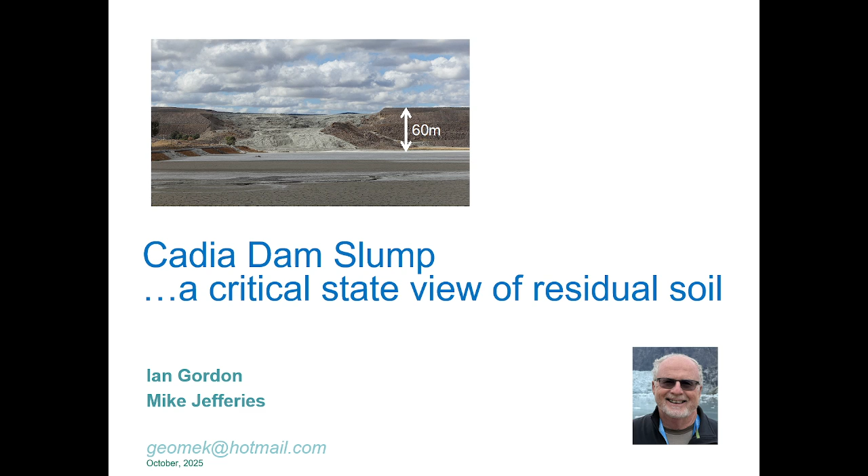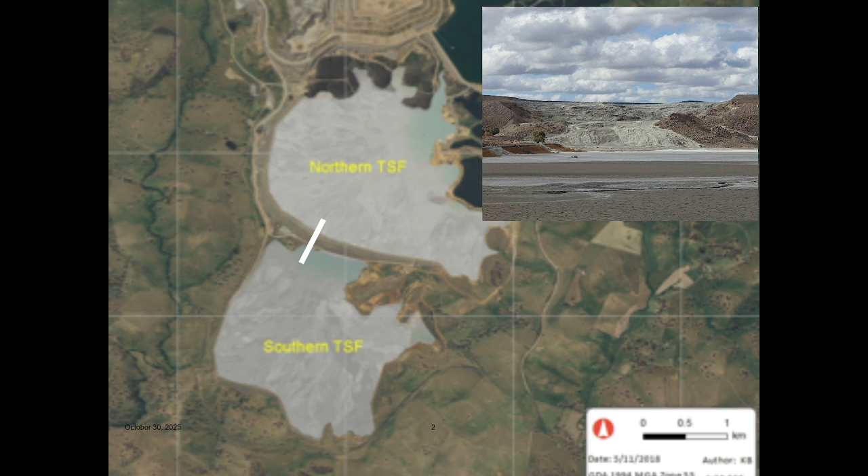If we look at what happened on the slump, this is kind of an air photo of the thing. The grid lines are a 1 kilometer spacing, and the northern TSF, the slump was where I have the white marker. Basically it failed on the corner there, and the failure was entirely contained within the southern TSF, so there was nothing released to the environment. When I look at the fluster and flurry and excitement in Australia, I'm going, hang on guys, you've had no breach of the impoundment boundary, this is an internal issue. But everybody got terribly excited, and of course we're happy if they get terribly excited because they then give us money, so we can get to do things, which we duly did.

The soil that caused the problem, the cause of the slump, has an undrained strain behavior like this. When you look at that, that's pretty much a classic liquefaction stress-strain curve: you come up to the peak, go zooming down from the peak, and it's all a bit brittle and happens rather quickly.

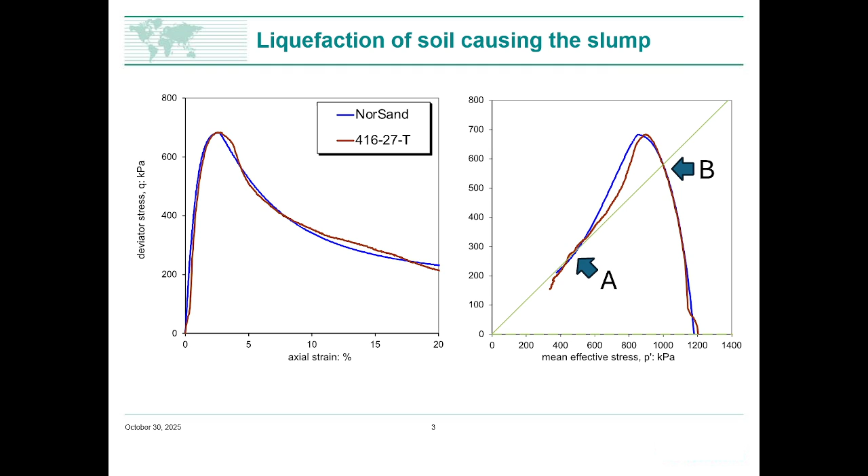However, that is not the tailings, that is actually the foundation. It's a unit called the Forest Reef Volcanics A, or FRV-A, and in the slide in front of you that's the stuff in purple. I'll come to a little bit more detail on that unit in a second.

What was going on at Cadia, and I'll get my trusty pointer here.

What we had originally in green was a conventional downstream constructed dam. And then as things go on, people say, well, let's go upstream and save some money, etc. So they switched to upstream construction, which is what you see there going up in green.

And then somebody said, whoops, this stuff looks liquefiable. We'd better put a stabilizing buttress in, because they were worried about this blowing out like that. That's the buttress there.

The intention was to put a further stabilizing buttress on this whole slope here. Well, they hadn't done that yet because there was a pile of rubbish at the toe. So they excavated at the toe to clear out the rubbish. Now you already know where this is going. The road to hell is paved with good intentions. So we're steepening the slope and digging a hole at the bottom. This is not a good plan. But anyway, that's where they went.

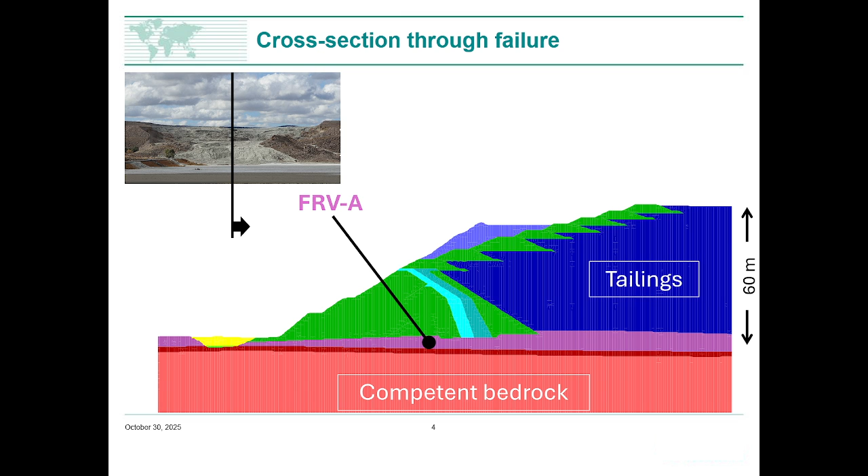So the engineers of the day said, okay, we'll expose the bedrock and get rid of the crap on top of the bedrock, and provided we're on competent bedrock, we don't really need to do a great deal of site investigation because we know geologically we've got a regional piece of rock. That is true in general.

However, down the corner where the dam failed, what we had was basalt that had flowed over the previous volcanic stuff, and the earlier stuff had decayed, become residual soil. So we had actually quite a weak residual soil, but it was masked by what appeared to be competent rock over it. So this stuff was never picked up at the site or when the dam was being constructed.

To be honest, I have also engineered dams based on bedrock and said, let's do it. I think I would also have been caught out on this one. But anyway, that's the story of this failure.

It's this stuff in here. We don't need to worry too much about that stuff there. That really was along for the ride. The story is about the Forest Reef volcanics.

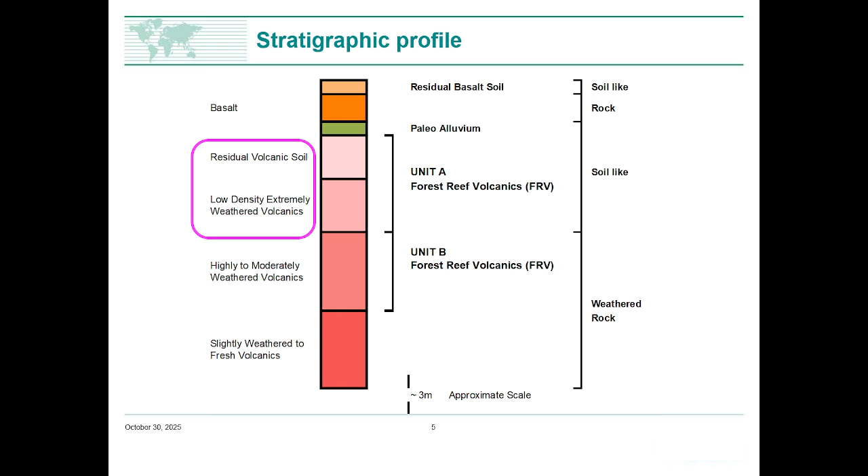This is a view of the failure looking from the top. These are the investigation boreholes, because this Forest Reef volcanics is actually, or appears to be, quite a narrow corridor.

So finding samples of it was actually quite a challenge, finding where it still existed. Now, the obvious thing to do would be to go in there and drop a borehole down and intersect the Forest Reef volcanics upstream of the failure.

That idea was indeed proposed. It was killed on health and safety grounds, that we weren't allowed access. Ian came up with the remark — we had a bunch of geotechnical engineers from both the board, Hatch, and a couple of other consultants — and Ian piped up, 'We have 800 years of geotechnical experience in this room. We all want to go there and you won't let us.'

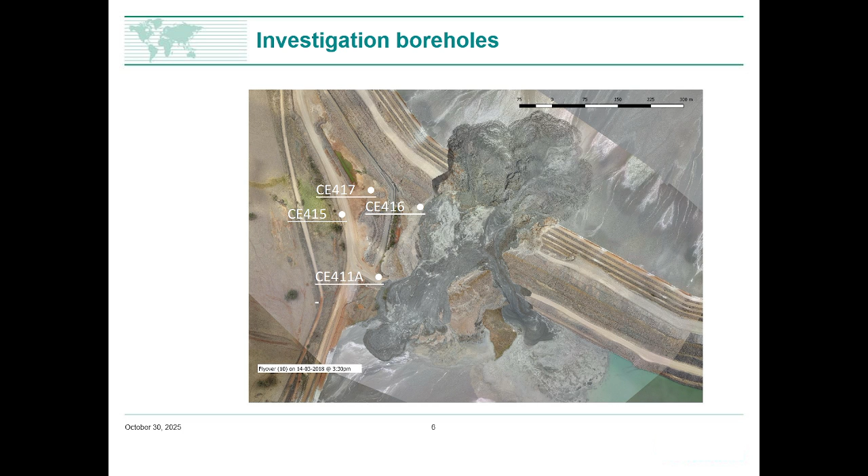Anyway, we were constrained with where we could go. So that's where the boreholes were done.

This is what the material looks like. In terms of a grading curve, you see up there, it's kind of mostly silt, a little bit of sand in it, and a chunk of clays. That's what it looks like when you get a sample and chop it in half. The white veining is kaolinite.

What I found very surprising is if you look at the right-hand plot, those are some void ratios of the as-recovered samples plotted versus depth. The solid symbols are the void ratios of the samples we tested. Also, some of the samples we didn't test actually had higher void ratios. But we're talking void ratios in the territory of 1.4, 1.2. This stuff is loose.

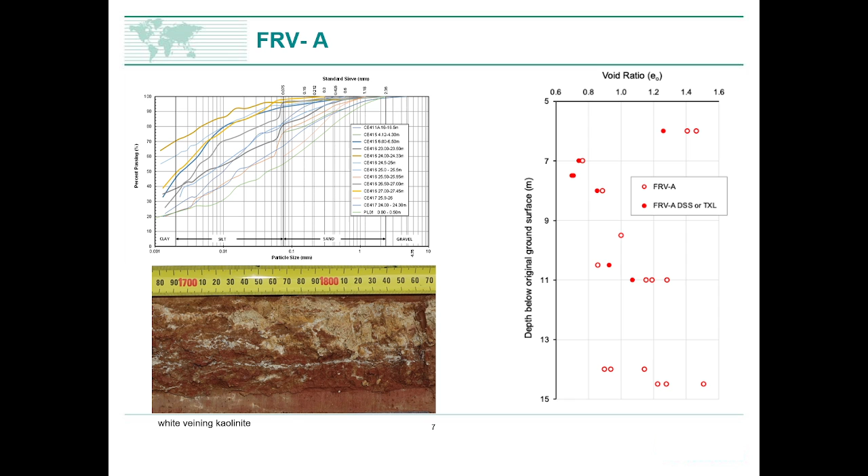Bear in mind, originally this was a volcanic rock that had a porosity maybe of like 1%, 2%, or 3%, and we've lost a lot of material through chemical weathering. And we've got a very loose structure. So surprise, surprise, it looks like a liquefaction failure.

And then we consolidated them to the stress range we thought of interest for stability of the dam, which is that grey zone, and that's a consolidation trajectory. Most of them more or less follow the oedometer curve, so we felt they were preserving original structure. There's one there, you can see, that one had a lot of disturbance in the sample, which then collapsed as we brought it to the interesting test pressure.

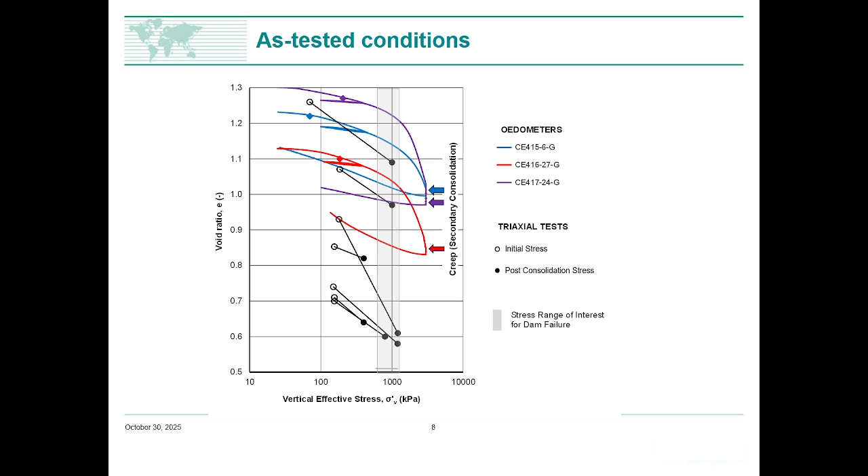Now, a feature of residual soils, and this is a residual soil, is they don't have any pre-consolidation pressure per se. They've just chemically weathered in situ, there's no prior loading. And the interesting question is, if we take one of those oedometer tests, what is the real fundamental thing going on? It looks like a very interesting curve which comes to a sort of pressure and drops down like a stone. What is the physical process underlying that curve?

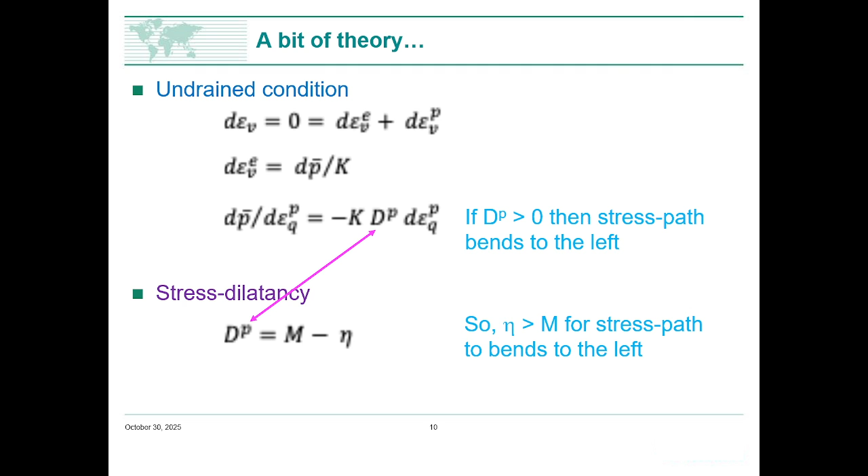So what we are able to do is link D^p to eta. And the key to this is, if D^p is greater than 0, then the stress path will bend to the left when plotted in a normal sense on a QP plot. So we have to have eta greater than m for the stress path to bend to the left, which is that thing. Now, back to my first slide.

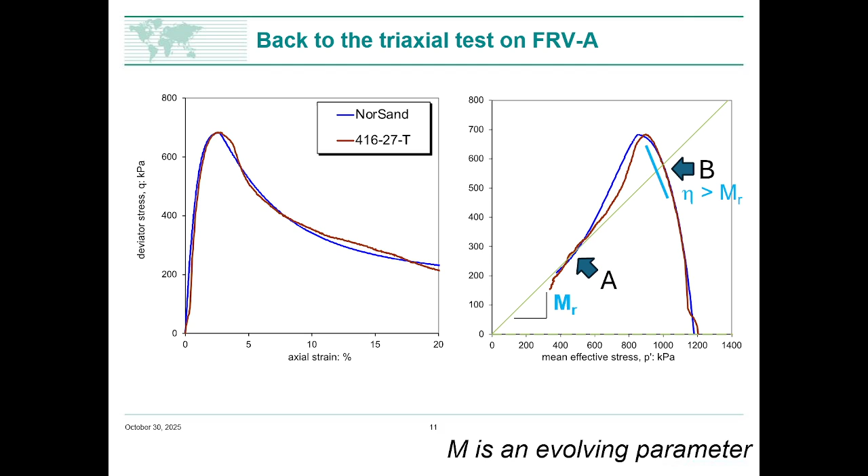We can see what m is down here. We're getting the end of test conditions. So my green line is just a straight line through the end of test conditions. You'll observe at point B, the stress path is bending to the left, and it's bending to the left above the green line. What that tells you is, up over here, eta is greater than m, i.e. there is a different value of M there than down here. So we're dealing with a structure which is manifesting itself as an M that evolves.

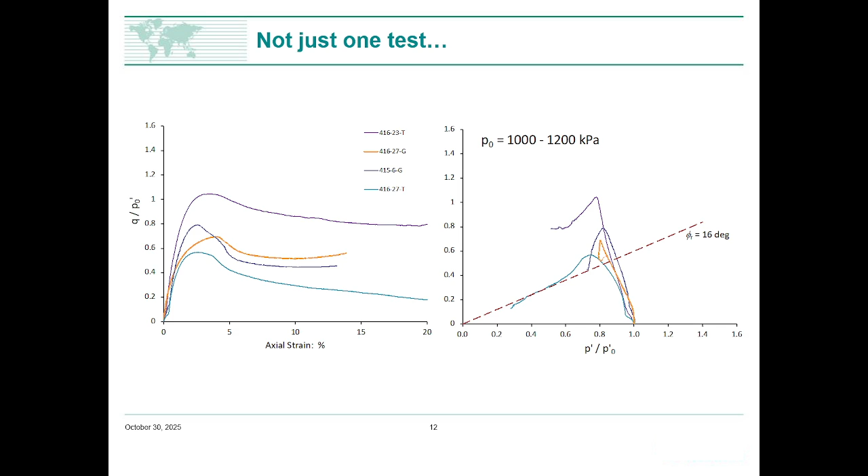This is one test. We have a bunch of tests, and they all show similar behaviour. If you want to put it in more Coulomb terms, the residual after a decent amount of strain was about 16 degrees, but the peaks are quite high. The strength trend for the high stress tests, which are basically tests that have gone past the crushing point, they have particularly weak values, like normally consolidated values. You have a claggy clay and you know nothing much else about it. SU over P naught is about 0.25, 0.27, give or take. That's spot on what we've got with this stuff after crushing.

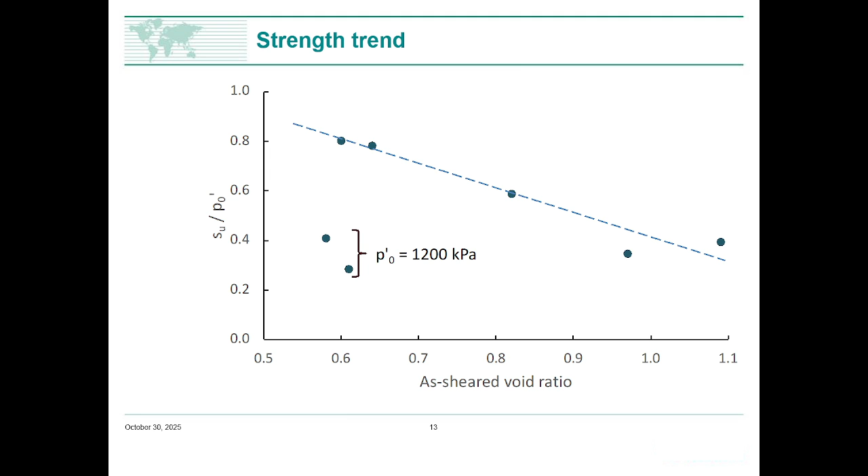But before we destroy the structure, we have quite a dependence on void ratio. And on the ones that aren't too weathered, it's really pretty decent - an SU of P of 0.8 is not to be sneezed at. And there is quite a strong effect of the erosion effect on void ratio. Once we get down to these void ratios of 1.1 or 1.2, we're back with a normally consolidated material.

In our profession, we actually have two soil strength idealizations. We have our friend Terzaghi, which uses the Mohr-Coulomb criterion, and that is not used in critical state models. Then we have the Taylor-Bishop idea, which I'm going to show you in a moment, which says soil strength has two components, called friction and interlocking.

This is the Taylor-Bishop model. The photograph top right is Don Taylor, bottom right is Alan Bishop. Don was an associate professor at MIT in the late 30s up to mid-40s, and what Don did was a lot of shear box testing.

Don tested for the Fort Peck dam failure amongst others. What Don noticed is when testing sands in a shear box, if he was testing a dense sand, the weight on the hanger would rise up as the sample dilated. Don did a calculation and said, hang on a second, out of the work done - that is the force pushing sideways times the distance travelled - 30% of that work is expended in raising that weight.

So he said, okay, there's something going on here, and Terzaghi's got it wrong. We need to account for the movement of work against confining stress. Don put his findings in his book, published in 1948. Curiously, he never put an equation to it. You can read Don Taylor's book, and it's a wonderful textbook on soil mechanics, despite being now 60-odd years old. But he always dances around mathematics.

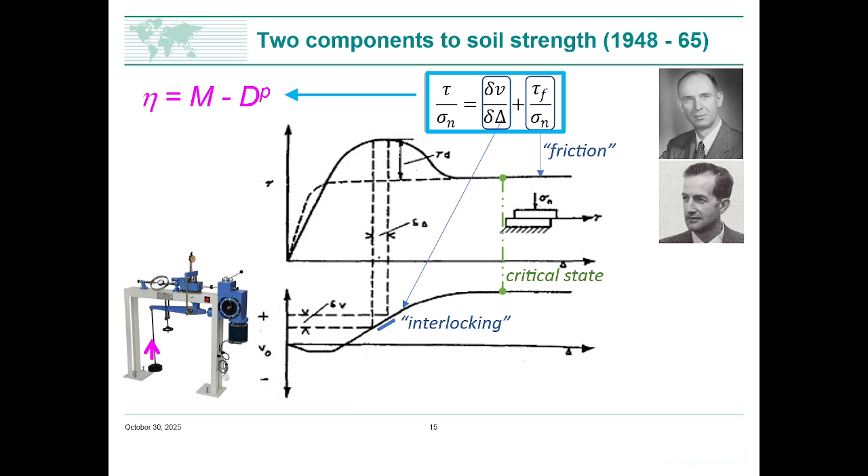And that just goes to that. Now, that equation was derived or started from testing on reconstituted loose and dense sands, but reconstituted samples with no fabric. It was subsequently investigated for clays at Imperial College, and God help us, they took like 6 years to do drained triaxial tests on clays, involving like 4 theses. They started by taking some London clay, digging it out, and putting it in a blender, mixed with distilled water, making a stockpile in an oil drum of this reconstituted, wetted up, structureless London clay. That then became the inspiration behind original Cam Clay.

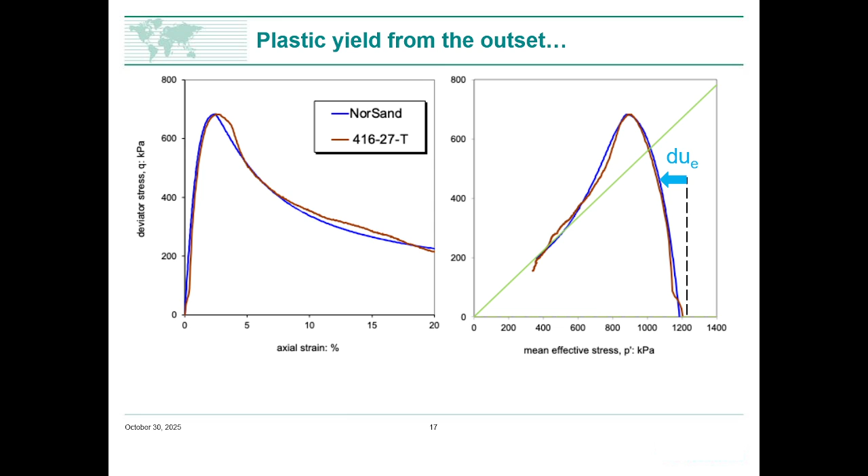If you have an undrained test like we have here, there are two components for pore pressure. There's a component that comes from changes in total stress, and if you draw a vertical line, the bit from here to here is caused by plastic strain, the equation I showed you earlier. So here we have, from the get-go, a structured soil. I'm generating excess pore pressure from the start. If I go back to this expanded yield surface, if I've expanded it out here and I'm down in here, there should be no excess pore pressure, because it's elastic.

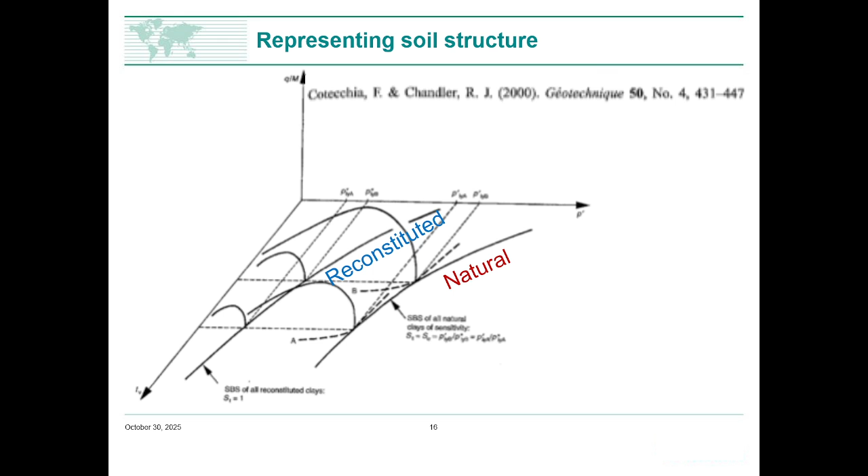So what we've done, it's just gone too far. Now, in defense of these people putting this stuff forward, they have not pushed it for residual soils. They've done it for structured soils, whatever they are. But clearly, residual soils fall within the topic or category of structured soils. So the question then is, okay, what are we going to do?

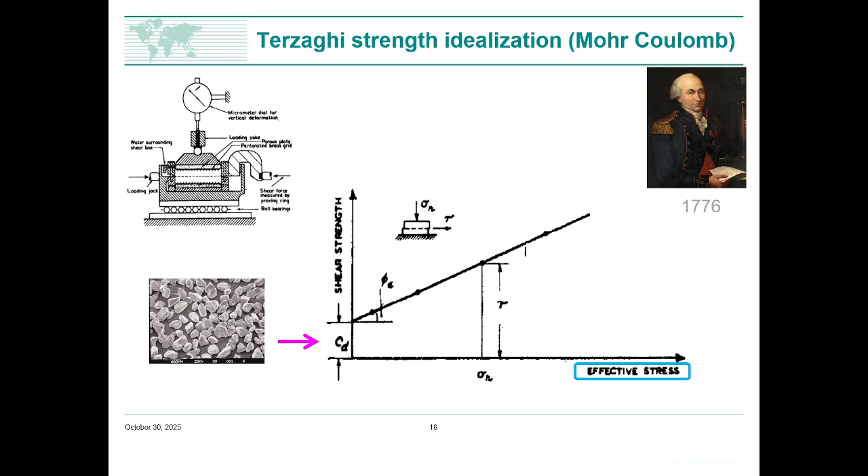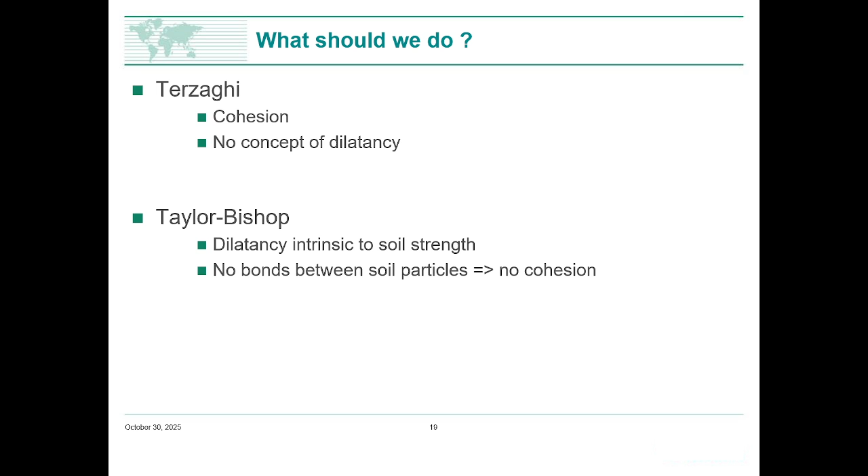That is not true of residual soil. We have a decaying thing, and the structure of the residual rock, or the original parent rock, is still there. So what should we do? Well, Terzaghi has cohesion but no concept of dilatancy. Taylor Bishop has dilatancy intrinsic to soil strength, but also has no bonds between soil particles. But they're not mutually exclusive. Why don't we just cut in cohesion on top of Taylor Bishop and say it's possible to have cohesion with dilatancy? So what we proposed was this.

We said M, our critical state friction ratio, is composed of MR, our residual value at large deformation when we've broken all structure, and MS, our structural component. At the back of our minds when this was put forward, we thought MS would be 2C, because we're going to flip from cohesion, which is in SU space, to Q space over P dash. We said, okay, we'll run with M, which has its structure in it, up to a certain point, and then we'll allow M to decay such that over here I'm on MR. So I'm introducing, if you will, a cohesion into critical state.

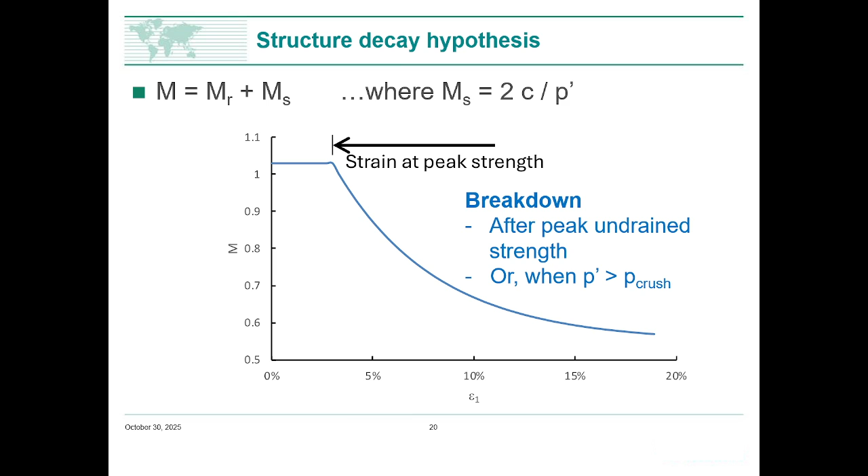And I'm introducing, I haven't put a cohesion in, I've got to have a decay law. The question comes, okay, when does decay kick in? We used two criteria. We said, okay, after peak undrained strength, if you see the stress strain curve dropping, well, patently you're starting breaking things. So that's one trigger criterion. The second trigger criterion was if P dash C exceeded the crushing pressure, which we identify from the oedometer tests. So we had this variable floating around, this crushing pressure. So you may say, okay, I've got three parameters now: MS, the rate of decay of MS, and the crushing pressure for when MS kicks in.

This is the data at the onset of structural breakdown, so this is when either I'm hitting my crushing pressure or I'm hitting peak undrained strength. I've also put the oedometers on this figure. The oedometers are the green diamonds, because in an odometer test you do have Q as well, it's not just a sigma V thing. So if we assume K naught is say 0.6, I can convert the sigma V into a shear stress as well, and that allowed me to put the crushing pressure observed in the oedometer test into this plot.

The blue dots are all triaxial tests. We can inspect the triaxial test and say, okay, there is a peak, or when we get ourselves into crushing. Now, when I started down this road, on the story behind the idea of residual soils, with some built-in structure from the parent rock, I was expecting a true cohesion, which is that black line. And frankly, it's not there. The data has a very clear gradient, which you see there.

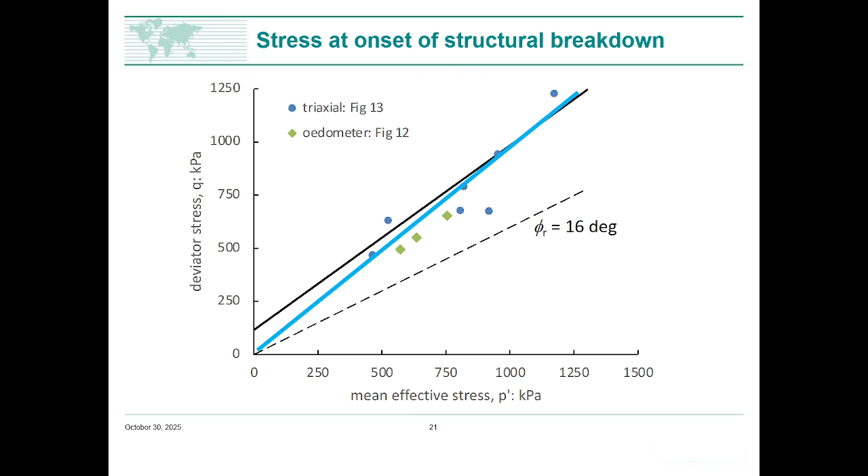With hindsight, and my co-author berates me for my stupidity, we probably should have gone with the blue line I show on the screen. But what is in the paper that accompanies this talk is the black line. I was just wedded to the idea there has to be a bit of cohesion. Please, Lord, give me a bit of cohesion. So that's what we went with. So, to North Sand.

Those of you who are not familiar with North Sand, it's got a handful of properties, literally about that.

Normally, when we're determining critical state loci, we do a whole bunch of samples, each of which is the same material, whether it's in clays or sand or whatever, so I can join points together to estimate where the CSL is. I can't do this, where each sample is different from its neighbour. So what did I do?

What I did, I said okay, for the purposes of this, we're only looking at quite a limited range of change in P dash in a triaxial test. It's actually good enough to assume a semi-log for that, even though we've actually got quite some extreme curvatures, because I'm only operating in a limited range.

And we assume, because we're dealing with very loose soils, that lambda 10 of my CSL was the same as C sub C. Now we allowed C sub C to be different for each of the triaxial tests depending on the initial confining stress, but that's how I'm picking up my compressibility. And the kludge of lambda 10 equals C sub C, that's not bad if we're dealing with loose materials. Remember, my void ratios were 1.1, 1.2.

Not bad. My next property is the volumetric work coefficient, N, and there's absolutely no way I could recover that from the available test data. I've looked at many soils over the years, and N always seems to come out about 0.33, or a third. This is suspiciously close to our friend Don Taylor, who said a third of the work has been going there. But anyway, my go-to number for N is about 0.35.

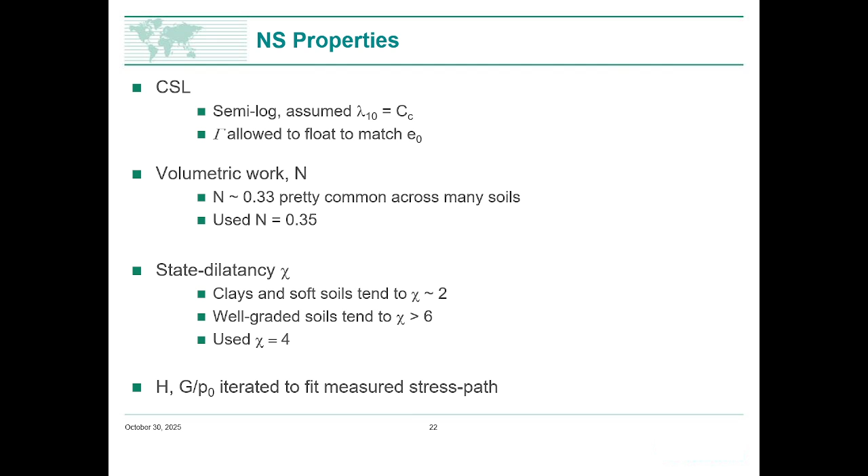And then the other two, which is the stiffness and the elastic modulus, I just iterated those to get the best match to the stress strain or the stress path. So that's how we fitted it.

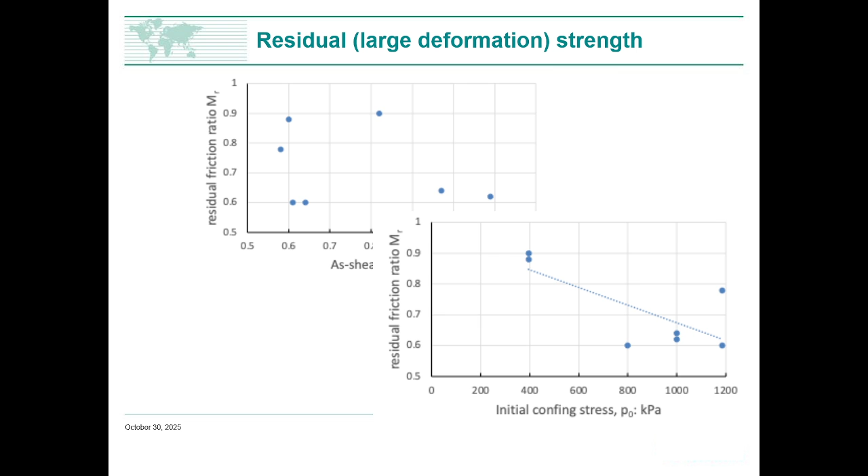Yeah, it would be nice to have had a bit more tests. Now the decay - this is the structure which we're going to put on top of that, and perhaps there's a weak dependence of structure on confining stress, which is the dotted line. I'm slightly loath to call that real. This may just be random, because these residual soils are not remotely close to uniform - they jump all over the place. So what we may be looking at is just simply the random variation.

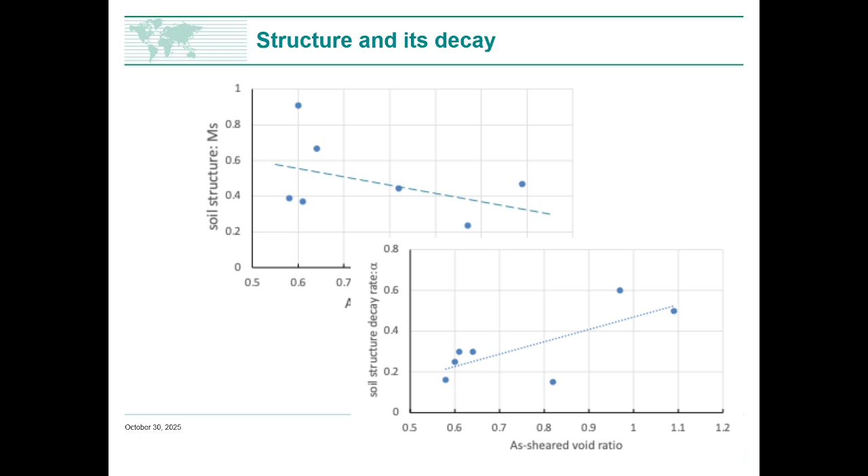The decay rate, though, showed a much happier pattern. The curve I showed you, that simple exponential decay, characterized by just a parameter alpha, did seem to show that the looser you got, the faster things happened in terms of breaking down. And that seems to me physically plausible.

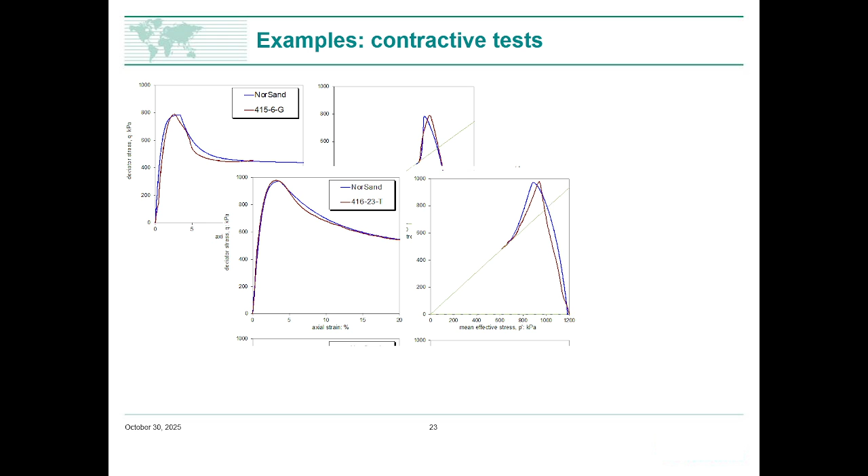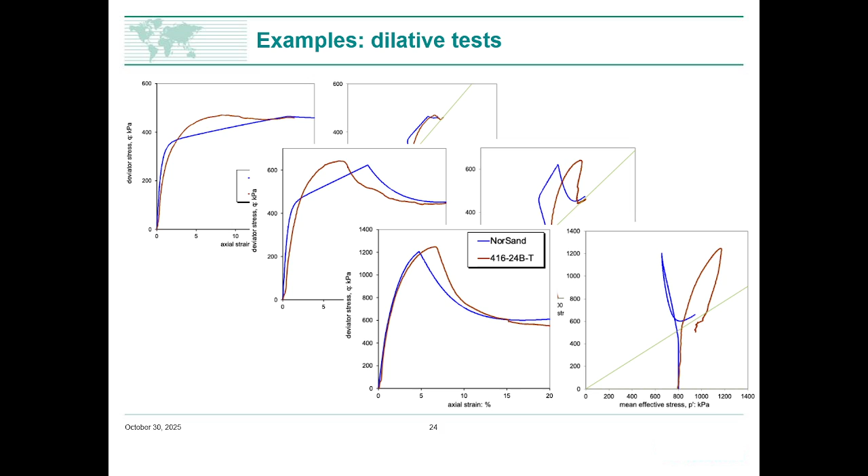What is interesting, when modeling these tests, is the end point of the stress paths - and in the case of the dilating ones, the end point is controlled by state parameter divided by lambda. So I can fit the end point. Given I've assumed a lambda value based on the oedometers, I can calculate the state parameter because I've fitted the endpoint by varying it. And that is the state parameter I come up with.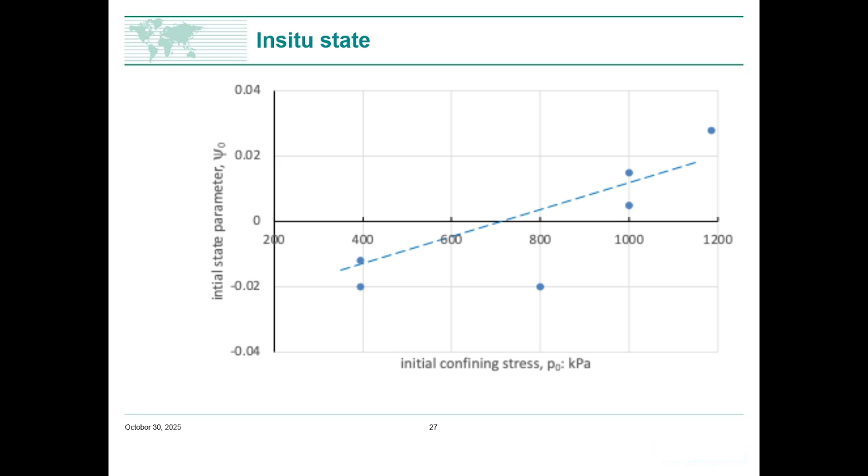There seems to be some sort of trend - the stuff is around its critical state at the current stage of weathering. Don't take it from me as a suggestion that if weathering continued, it can't get looser. I'm half tempted to put this trend line through it, but you could also plausibly say perhaps you have one state parameter to arrange your crushing regime, and then it rapidly decays to a much looser state. That would also be a model or an idealization. Sad thing is, I'd kill for another 10 tests. I don't have them - this stuff was difficult to find anyway.

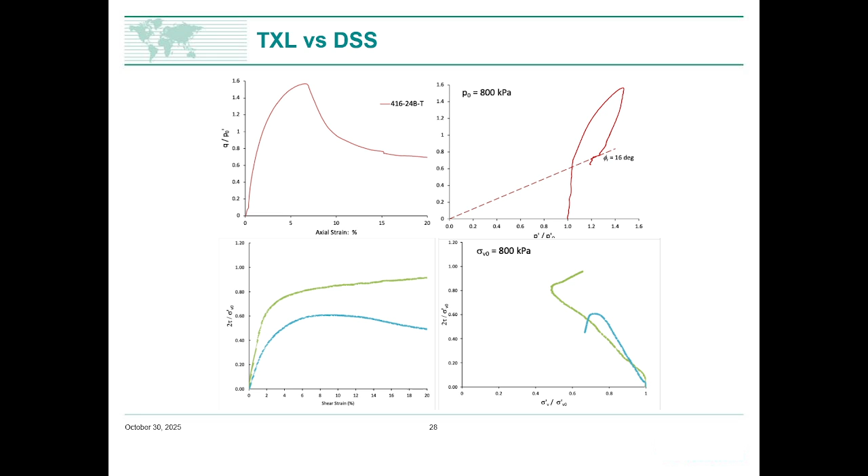Triaxial versus direct simple shear. Those of you who have read the Cadia report will know the board put a lot of weight on direct simple shear. There are some examples of direct simple shear, and a triaxial test at roughly the same confining stress. Post-peak, the endpoints are not a million miles different. But the direct simple shear simply does not show up the structure we saw with the triaxial test.

Now, truth. If you're using limit equilibrium on a case history, you just assume the factor of safety is 1 and then calculate whatever strength you're looking for. You can't do that with a brittle model like we're running here. We know we've got a material whose properties are changing, not a simple rigid, perfectly plastic stress strain curve.

We've got something that's yielding, something that's decaying with strain, and it is loading up somewhat plastically. What was done was to use FLAC, and the various properties were changed to try and replicate the observed pattern of deformation. That's why I call it iterating to failure. We're trying to guess properties and see how things are coming in.

What's quite interesting, we had tailings liquefied over there, and the best estimate of the state parameter based on the CPT was plus 0.06. At plus 0.06, with the strength properties of the foundation, the whole thing fell down. Now, I think that was a limitation of FLAC, but that's what is in the ITRB report.

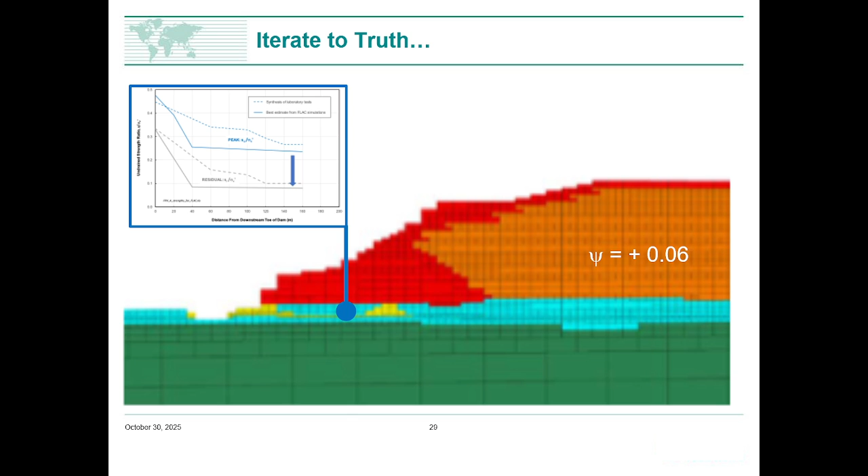Things were stepped through on the analysis, starting with 2D. And the problem with 2D, you can't put that excavation in because it was only quite localized, and then you're triggering everywhere on it. And there was also, as you can almost see from the way stuff flowed in, a strong 3D component of what was going on.

And that then led to this graph here, which, I apologize for the lack of clarity here. This is a problem you get when you do something on an Apple and you transfer it across to an IBM PC. For some reason, despite Microsoft saying PowerPoint is PowerPoint, you actually seem to lose some resolution.

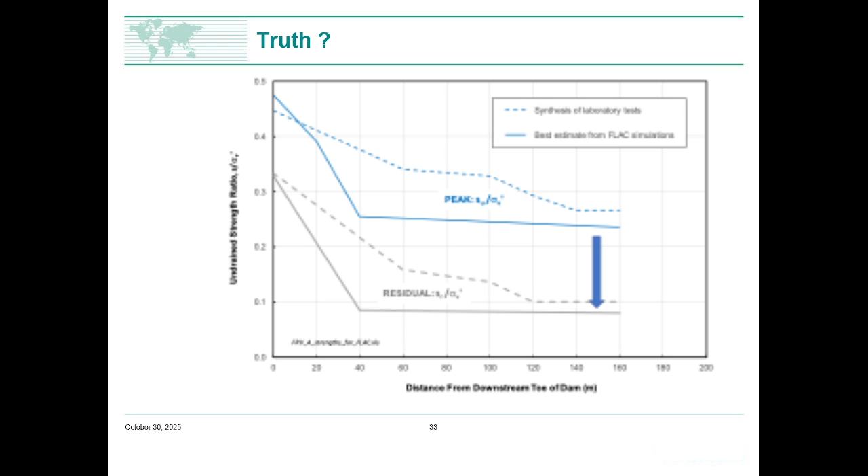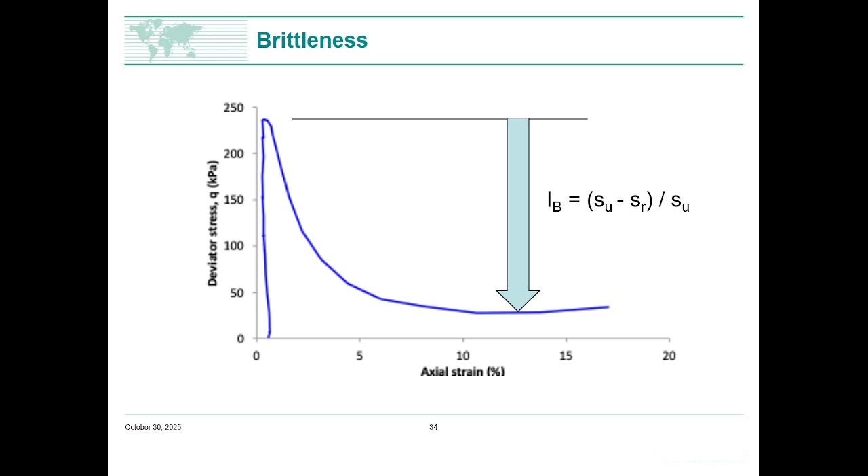Now, there's an issue of brittleness. This is a standard definition of brittleness, and I give one of the equations on the right-hand side. We basically treat brittleness as the difference between peak strength and residual strength. So a high brittleness means high probability of losing a lot of strength. Low brittleness means we don't get much strength loss.

I now need to take you from Australia to Alberta. What you're looking at here is the Tar Island Dyke. This is in Suncor, and this is 50 years ago, a bit more than 50 years ago. And the guys then were frantically building an upstream tailings dam, which is the cross section you see down here.

They had a perception that stability was controlled by the rate of rise. So they were doing a number of trials, I wouldn't call them experiments, but trials to establish safe placement procedures. As part of that, they actually had 4 failures, or 4 really quite large slumps. And bless them, they documented that in the literature.

The nice thing about this is when we put an upstream raise in here, it goes in over a period of a few months, and it's a simple dead load. Subsequent to this work in the 70s, Suncor continued to build this thing, and the dike eventually went 100 metres high. And as things went on, it became more engineered.

So from about 1990 onwards, there's just a raft of CPTs and a raft of high-quality triaxial tests. But the construction procedures established in 1975 continued even to today, and the feedstock and its placement remained the same. So we made the leap that this actually was a good case history to calibrate the finite element method.

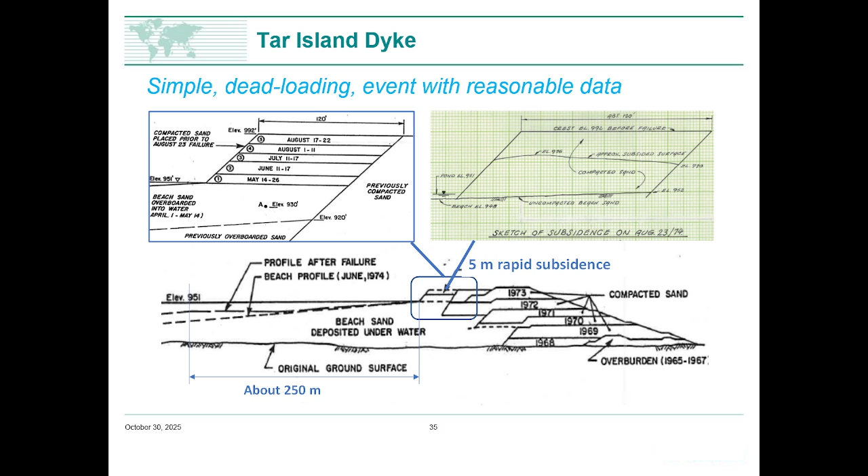What we did, we set about analysing the slump using Plaxis, and we got some spectacular results. There's a paper you can download and have a play with it.

I don't want to go into that too much tonight because we're supposed to be talking about residual soils, but something we came up with was this. Our base case, when we took the parameters at face value and ran the simulation, we got a failure mechanism that looks like this. There's my slump, and we've got 4 metres of settlements.

This is large strain Plaxis, so we get the true settlements - we've got 4.5 metres, and this is the shear strain contours. The guys at the time said it went 250 metres upstream. That's what we computed. It's just a lovely failure mechanism that matched what they reported in '75.

If I reduce G by a factor of 3, keeping the state parameter, the same soil properties, the same compressibility, everything else, the same loading rate - just change G - I get that mechanism instead: a simple, low significance rotational failure.

Well, what is going on? G controls two things. When you get an overload, you have to push the stresses to the adjacent soil. The propagation velocity is controlled by G. Higher G, faster it happens.

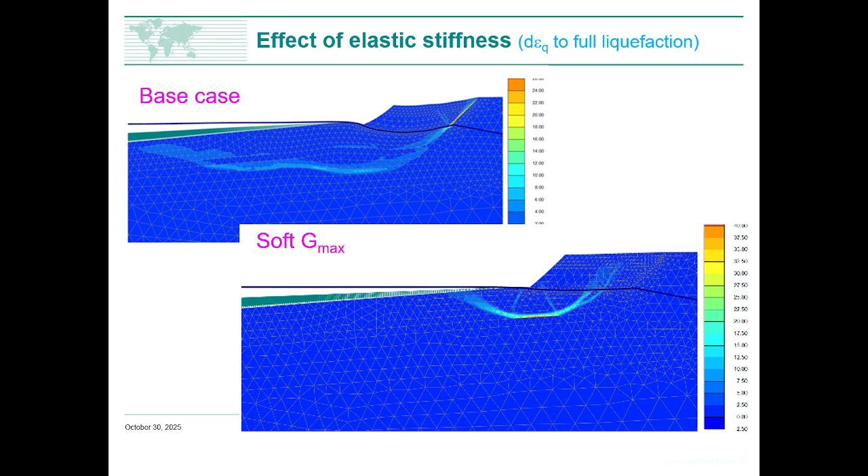G also, in most elastoplastic models or variations of it, controls the excess pore pressure in the theory, and we've damped that down. But what it means is, if you go back to a stress strain curve, previously we were talking of brittleness as being from here to here. What we found in Tar Island, that gradient seemed to be the gradient that controls.

Now, we discovered this 3-4 years after Cadia, so this wasn't in the Cadia analysis. But I think that's what was missed in Cadia - there is actually a propagation velocity that we need to pay attention to.

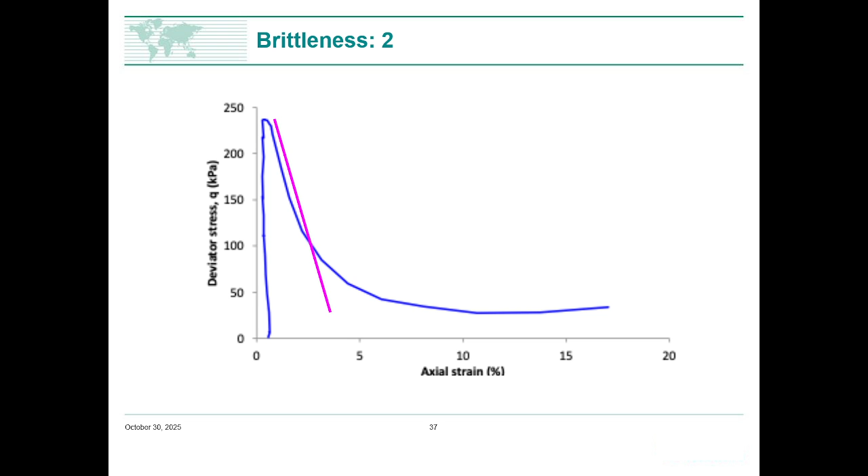And interestingly, you've all seen the Brumadinho failure where it starts over here and it just unzips. The propagation velocity in theory is approximately Vs divided by 4. Vs was measured at Brumadinho, it's about 210, maybe 215. Divide that by 4, 50 meters a second. If you time that video and watch the propagation and look at the distance of the dam, you get 50 meters a second. So the theory hangs together, but that means this gradient is important.

So, what started this approach to Cadia, and why was my interest piqued in it? Well, it was started by this paper by Laurie Wesley, who wrote a paper on what should be taught or not taught in postgraduate engineering or geotechnical engineering.

Laurie - if you know the triaxial cells you use today, when they first came out they were called the Bishop Wesley cell, and Wesley is Laurie Wesley. So he was, shall I say, a fairly fancy thinking PhD from Imperial College. He's actually a New Zealander. He went back to New Zealand, became part of, I think, University of Auckland, but also had quite a consulting practice, and he spent pretty much most of his life working on residual soils.

And he made the point that residual soils cover about 50% of the earth, but all our universities teach are sedimentary soils, or sedimentary ideas. And he said this really isn't good enough because sedimentary doesn't apply to residual - there's no such thing as a pre-consolidation pressure, and the Cc, Cs idealization doesn't work as well.

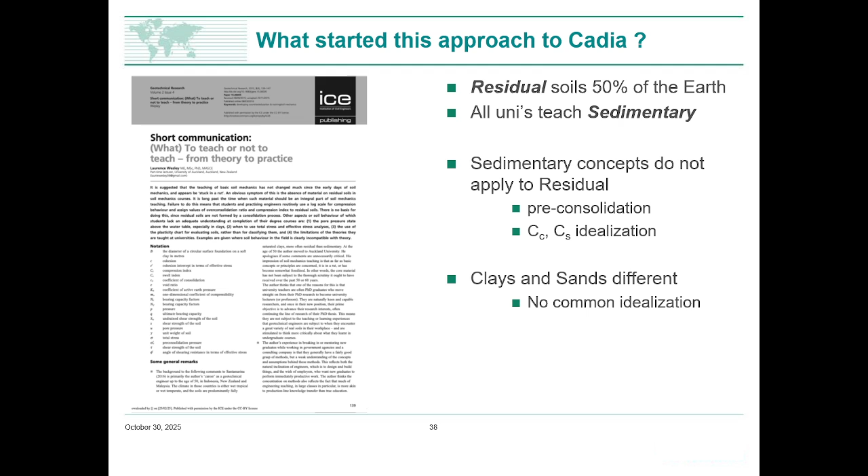And he said clays and sands are so different, there should be no common idealization between them. And then what was really worse, he said it follows from the preceding comments that critical state soil mechanics shouldn't be taught. And believe it or not, this was published by the Institution of Civil Engineers, which is almost the home of critical state soil mechanics.

Now, those of you who know me will realise when I read this, the steam came out of my ears. Because if you've got something that's worked some of the time and you come up with a case where it's not working, you don't say, well, let's throw it away. You should say, what have we missed? And that would have been the correct question.

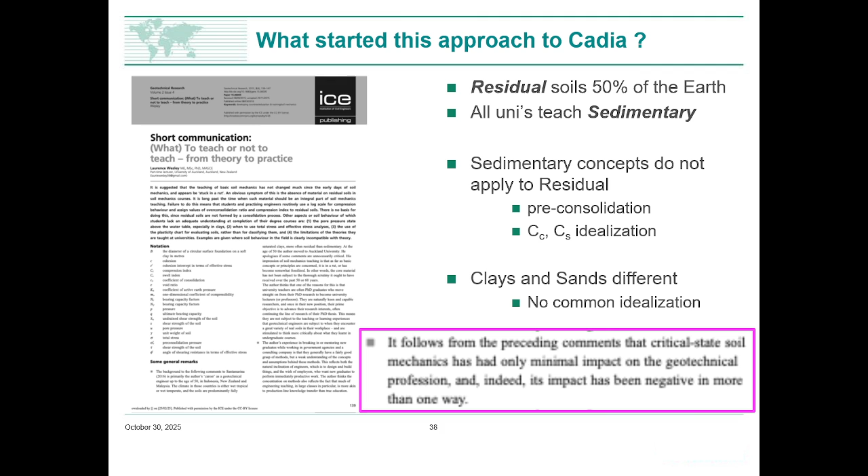So that was what was driving me. So on with Cadia, thank you, Lord, you've given me some residual soils and some decent triaxial tests. That's why I got interested in doing it.

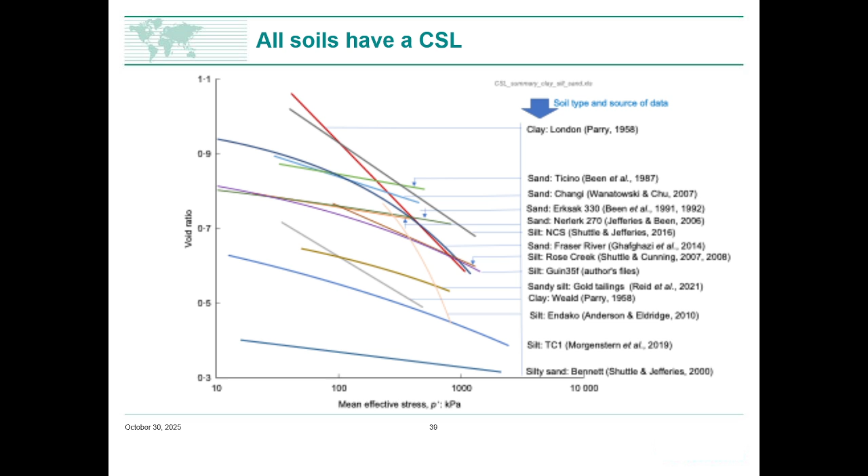And the first point, I'll quickly go through material type independence. On the right-hand side of the figure is a bunch of references and the various soil types indicated. The left are just critical state E log P stuff, and the coloured lines are the different soils. And the point I make is it doesn't matter whether you've got a sand, a silty sand, clay, sandy clay, whatever you've got. You'll get a different curve, but the same equation applies. A critical state exists regardless of the particle sizes or independent of geology.

And quite clearly, when we look at our tests themselves, we've got a residual critical state. You know, they plot up.

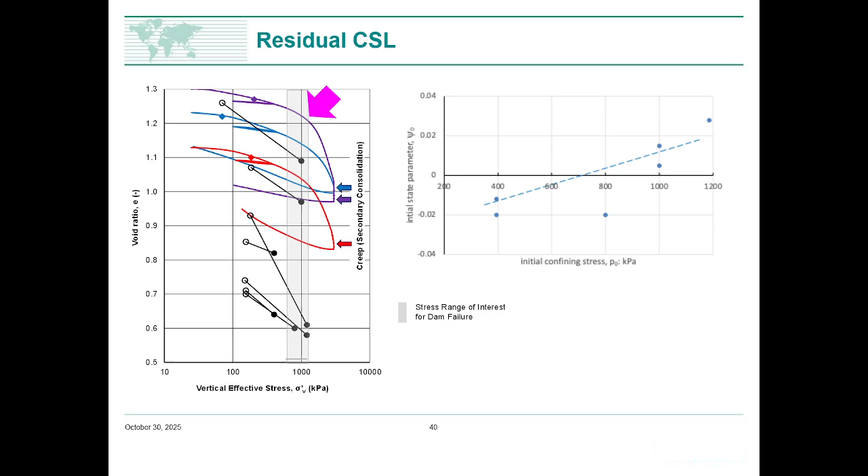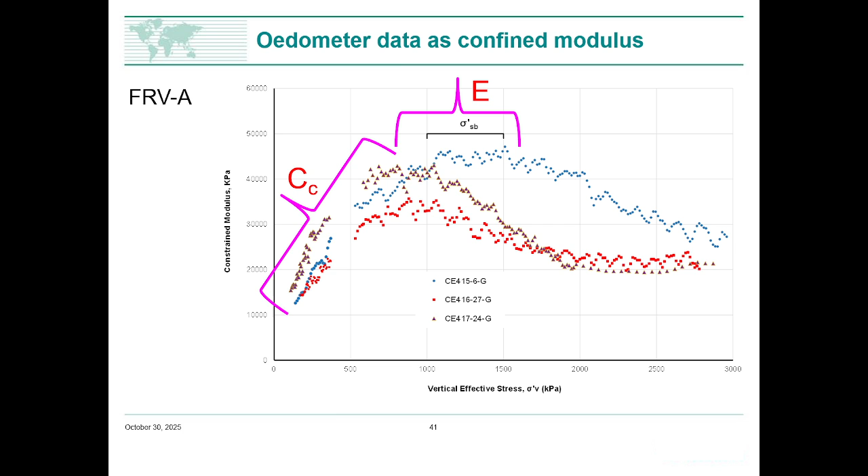As for the oedometer, addressing Laurie's points on using C sub C, well, C sub C is perfectly valid up to crushing pressure. That's what the data says. Of course, you've got an OCR of 1, you've got no pre-consolidation pressure, but C sub C is fine, or some variation on it. Then you run into a regime, a constant modulus, and then you run into a collapse regime. You've got to put the three bits in, but don't just say, oh, it's all somehow magic, you've got to do an E-P curve and work it out. No, there's mechanics here. We can understand what's going on.

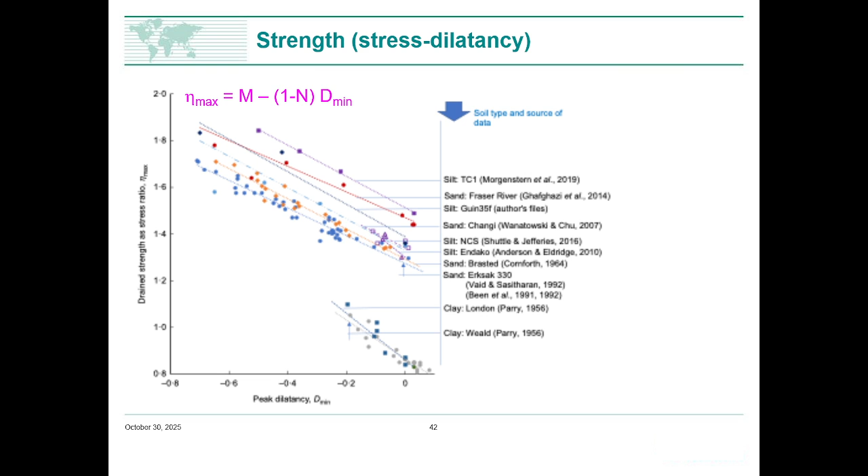Strength is stress-dilatancy. Again, same thing. Silt, sands, clays, whole yin-yang, the same equation in purple applies. Independent of geology. Yeah, the coefficients change. If we're in a clay, M might be like 0.9. If we're in a tailings, M's probably 1.45. But the equation doesn't change. Laurie's point that you can't put math to this and the math be material independent is simply wrong.

State-dilatancy, exactly the same story. Different soils, same equation applies.

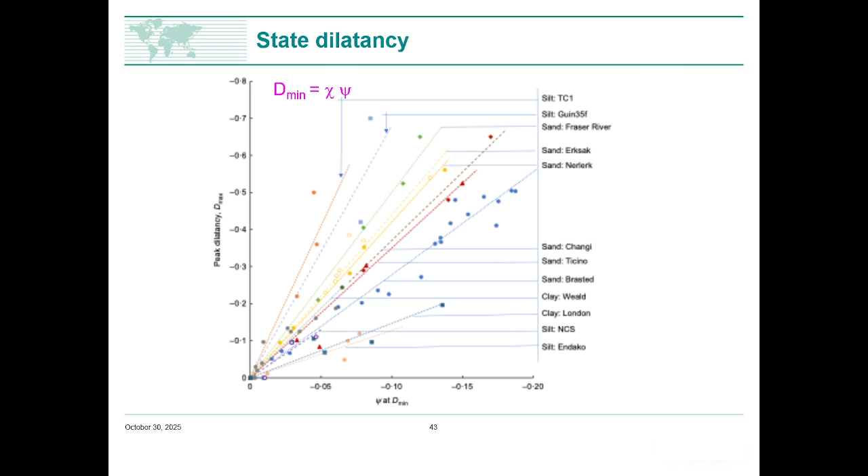So, what have we done here? Well, I've taken you through a residual soil and I've applied a critical state framework to it, and I've done my best to explain how very simple ideas can be added. The ideas I've added are a crushing pressure and a degrading plastic dissipation. I have answered all of Wesley's objections and critiques. You may not realise it from me standing here and talking to you, but if you go through, I've covered all his points.

Having done that, it's not good enough for me to just stand here and say that. You've got to put this stuff out and say we reply. So we have put out this paper, which is now in press, in the same journal where Laurie published. I wanted to call it Critical State Residual Mechanics, but the editor just wouldn't let me have it. I thought it would be a nice play, with residual in italics. Surely they're going to let me get away with this, but no, I got a slapping down for that.

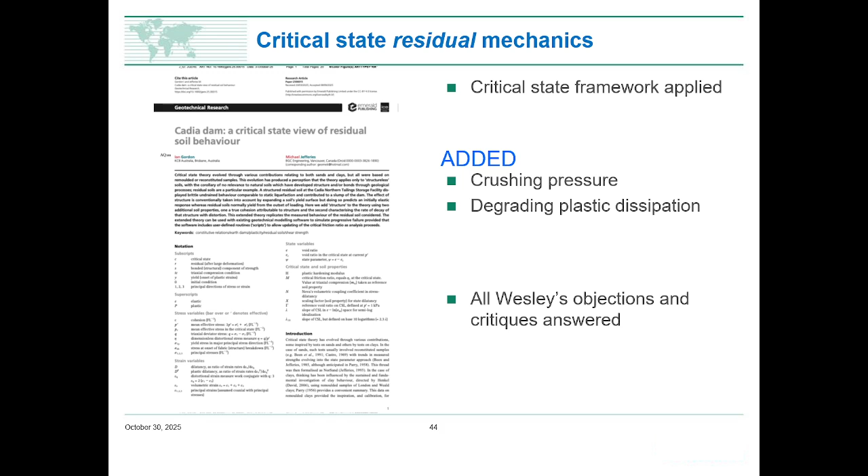So that's where we went, and that is where we are. Questions or discussion, because some of this is new. It's not, what do you do on this? Maybe you got some ideas to tell me.

Yes. Thank you for the presentation. My question is regarding the stress strain results and end of test condition.

To be honest, when you're out to 25% strain on a triaxial test, it's also a question of what stress means. The sample's looking like this: stress in the middle end, stress on the top cap. And there's a bit of assumption about whether we're using the barrel correction or the offset shear plane correction.